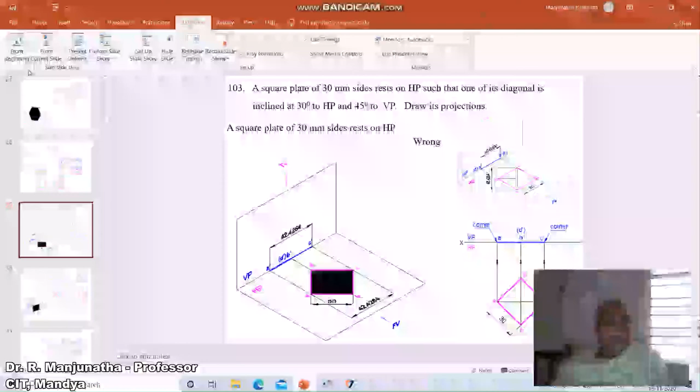A square plate of 30 mm side rests on HP such that one of its diagonals is inclined at 30 degrees to HP and 45 degrees to VP. Draw its projections. So how to start with the given problem?

Here he has not mentioned whether it is resting on HP on its corner or whether the base is resting on HP. But he says that you have to keep the initial position of the square plate such that one of its diagonals is inclined at 30 degrees to HP and 45 degrees to VP. That means the inclination given is the true inclination.

There are two possibilities in which a square lamina can be placed: one with a side on HP and the other on a corner. If I place one of the sides on HP, the diagonals will become inclined to VP. So obviously you will not be able to get the true length of the diagonal in the front view when you place one of its sides on HP.

So this position will become wrong, because the diagonal AC is inclined to VP, so A' C' will become apparent length. BD is also inclined to VP, so B' D' will become apparent length, but the inclination given with respect to HP is true inclination. If you rotate in the second position, you get the apparent length while the inclination given is true inclination. So I cannot redraw this sketch in the second position front view, and this position is wrong.

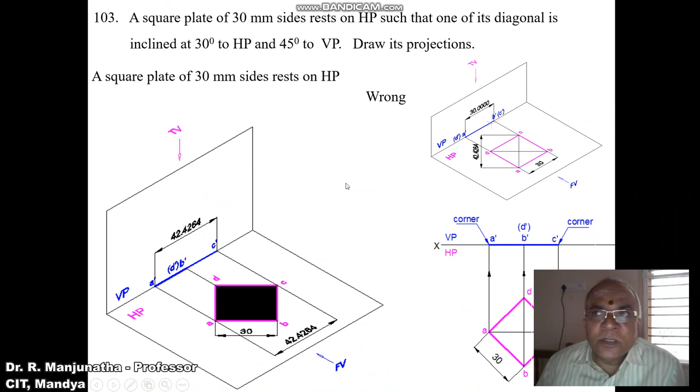Suppose you consider the corner position. AC is the diagonal which is parallel to HP, that is A' C', so you're getting the true length. Since the inclination given is also true inclination, in the second position when you rotate the front view, the diagonal will have the true inclination and the true length. So this position is right. Therefore we need to keep the diagonal parallel to HP, so the initial position has to be the corner.

From the front view, ABC is near to the observer, so A', B', C' are visible, and D is away from the observer, so D' becomes invisible. The square surface is parallel to HP, so you get the true shape in the top view, and it is perpendicular to VP, which is why you get a line in the front view. This end is a corner and this end is also a corner.

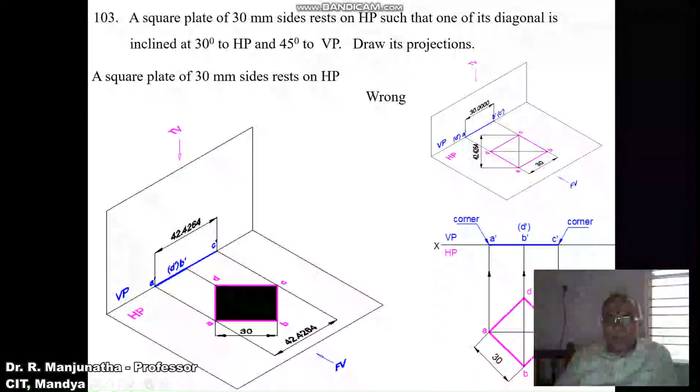The diagonal AC, that is A' C', is parallel to HP, so you get the true length in HP. As AC is parallel to VP, you get the true length in VP. This is how we place the initial position. Now one of its diagonals is inclined at 30 degrees to HP. Since AC is parallel to VP, you get the true length, and the inclination given is also true inclination.

Keep A' on the XY line and rotate the square by an angle of 30 degrees, so the diagonal also becomes inclined, and you get the true length of the diagonal here, because AC is parallel to VP. As AC becomes inclined to HP, you get the apparent length in HP, that is AC.

In the second position top view, that AC will become apparent length. So these dimensions are shown only for reference. In the second position, we can see the surface is inclined to HP and also perpendicular to VP. That is the reason why you are getting a line in the front view. So we can see the surface will become a line here.

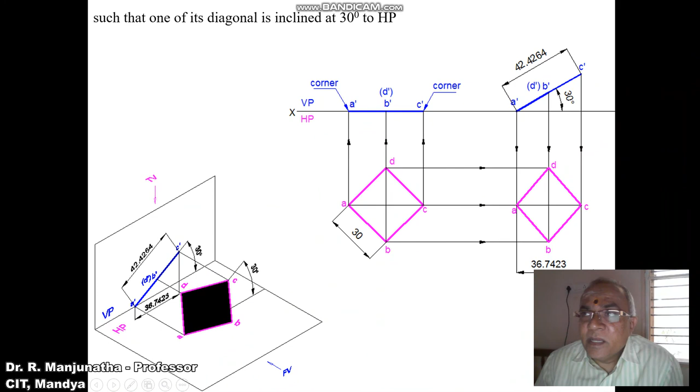So once the surface is inclined, the diagonal AC will also become inclined. So naturally we are going to get the apparent length. Then, such that one of its diagonals is inclined to VP also at 45 degrees. So the inclination given is a true inclination. So we need to find out the apparent inclination.

Why apparent inclination? Because in the second position top view, as the diagonal is inclined to HP, you are getting the apparent length in HP. So the inclination given is a true inclination. So on true inclination, how to get the true length? First we will be able to find out the beta inclination of this, then redraw the second position top view on that beta inclination line, and then draw the front view, so that you will get the final sketch.

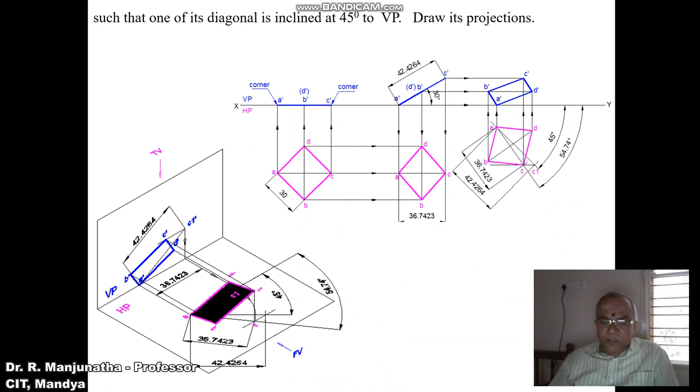So this is the projected sketch of the front view, and we can see the projected surface here, and this is the projected surface on the top view. So this is the beta inclination. We are going to get 54.74 here, so this is also 54.74. So on this we will be able to get the front view. So this is how you will be able to analyze the position in 3D as well as 2D.

Now we'll try to solve the problem. First we draw the XY line, and mark VP and HP as shown. Consider any point and mark this point as B, and with respect to the horizontal line, measure an angle of 45 degrees on either side, and draw an inclined line passing through the point B on the right side too. Using the compass with B as center, taking the radius of 30, cut an arc on this line and also on this line, and you get points A and C.

Through A, again take the radius of 30, draw an arc, and from C cut on the previously drawn arc, and you will get point D. Then join A to B, B to C, C to D, and D to A with a dark line. Then draw vertical projectors from A, B, D, and C to the XY line.

Mark this point as A dash. As we see from the front view, ABC is near to the observer, so A dash, B dash, C dash is visible, and D is away from the observer, so D dash becomes invisible, and join A dash to C dash with a dark line. So here this end is a corner, and this end is also a corner. As one of its corners is on the XY line, consider A dash on the XY line, as one of its diagonals is inclined to HP at 30 degrees.

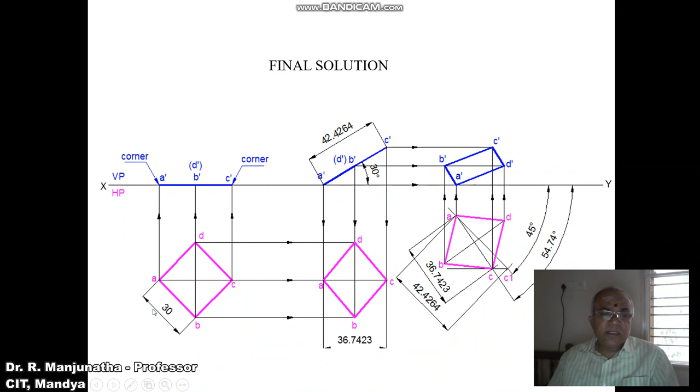Similarly, draw a horizontal projector from C dash and draw a vertical projector from C. Both these 2 points will intersect at this point, and you mark this point as C dash. Then join A dash to B dash, B dash to C dash, C dash to D dash, and D dash to A dash with a dark line. This is how we will be able to solve the problem in the sketchbook and show the dimensions of 45, and instead of showing 54.74, you mark that angle as beta, and the diagonal AC is inclined at 30 degrees to HP, and then this is the square of 30 mm. Since we have considered all the parameters which are given in the problem, hence the problem is solved.